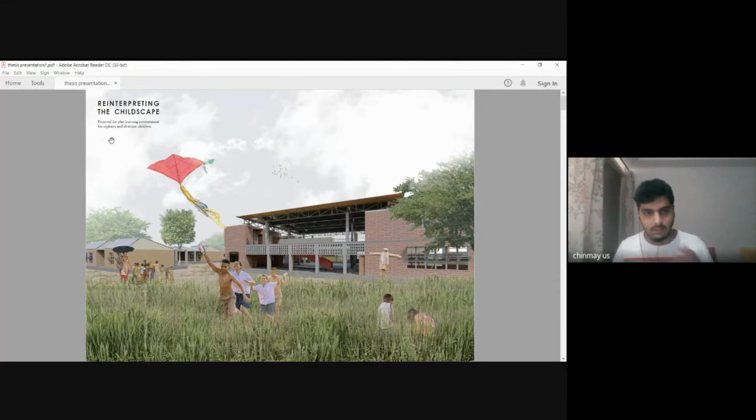So for my thesis, I did this called Reinterpreting the Childscape, which is a proposal for a play learning environment for orphans and destitute children. Before beginning the presentation, I would like to give a brief on what this project was about and what was the need for the project.

About the project, this thesis proposal tries to explore the role of physical environment in the design of a physical environment in the lives of children. For any thesis project, there are three components: observation, proposition, and anticipated investigation.

Coming to observation, what I observed was that schools which orphans and underprivileged children go to are very pragmatic, and they have very basic classrooms, toilets, etc.

So my proposition was that what is more important for schools is that they should be sensitive to children's needs and promote creative development. The investigation the thesis tries to explore is the role of architecture in a child's creative development through the design of learning spaces for them, learning spaces which can help them dream, aspire, and learn.

So we are in current times of 2021, and education has also sort of got reformed. There was this new National Education Policy that came in last year, which sort of reformed or is planning to reform the whole way education was being perceived in India.

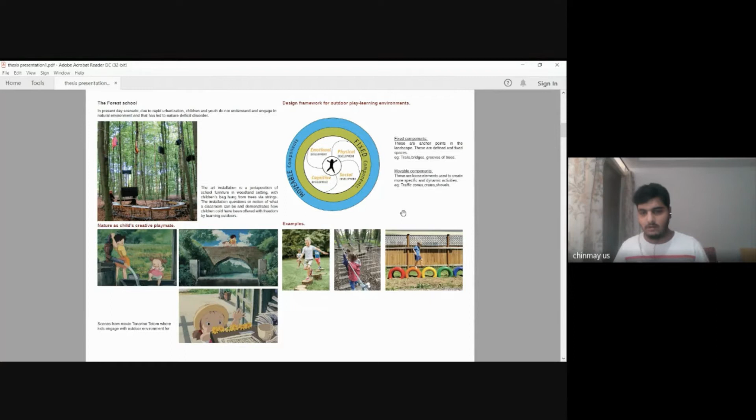So this is the case study which shows movable components and fixed components. If you can see, all these are textured pathways, and kids have these activity walls where they can write, draw, and all that. There are also some elements like seaters, where they can sit as a group or individually, and have storytelling sessions.

And coming to movable components, there are these very movable elements like tractor tires, or these slides, or these seaters.

Again, after going through a few articles, I realized we can't really design something and expect kids to use it that way. When it comes to kindergarten design, or designing for kids, more than designers, we are sort of translators. We design, and the outcome might be different. Kids might use things in a very different way. So we need to think of that notion of flexibility when we design any spaces for them.

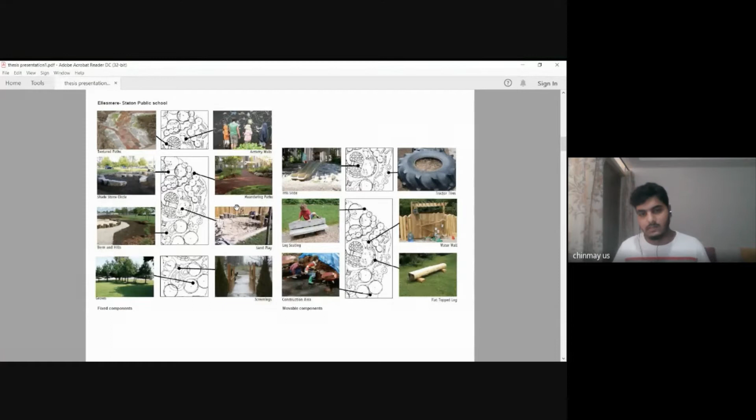So all this, why I'm trying to say is, I am not asking anyone to design these. All I'm asking is to think about these sorts of spaces, because outdoor spaces are just as important as indoor spaces.

So coming to the outdoor play areas, this circle now extended, and now we have certain different types of spaces for kids when it comes to outdoors. Those are gathering spaces, individual spaces, experimental spaces, ecological spaces, and active spaces.

So what are these active spaces? Active spaces promote fitness and health, which we usually see in a lot of our neighborhood parks. They have a lot of swings and acrobatic installations, which help them improve their gross motor skills. So those are the active spaces.

Gathering spaces are like congregational spaces where kids can come, have storytelling sessions, and share some of their stories, what happened in their homes, what happened in the class, etc.

And you also need individual spaces. Sometimes some kids might not go well with the community and want to spend some time alone. So as designers, we should also think of providing those spaces, a nook in the building design, a nook in the landscape.

Experimental spaces - if you see this particular image, in our childhood we used to do something very similar. We had some wreck of a boat, and made something out of it, and we needed some space for that activity. So these are like experimental spaces.

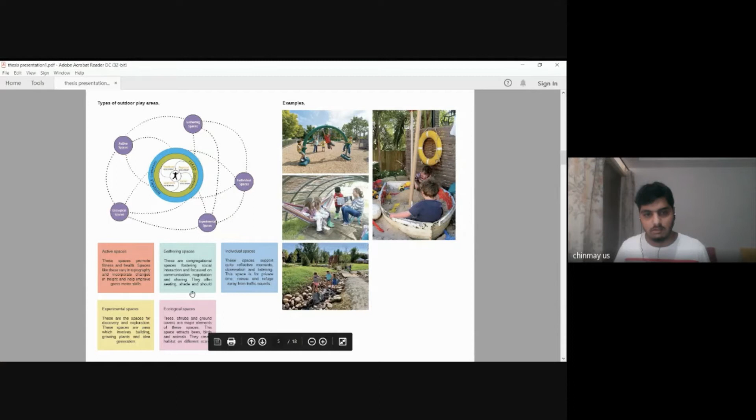So yes, this was the design proposal I made for my thesis. And the spaces which I discussed, I zoned them like this in my master plan. The site was north-south oriented, and in Mysore and Nanjangud, wind comes from southwest to northeast.

So in the south, I located this island. This island becomes the space for individuals. This is a water body, and you have the island, where kids can play. This kids' play area is an active place studded with play equipment, where they can have their physical development. And in the back, I have space for plantations.

I visualized my project to be more about spaces for rural kids, and the way rural kids see landscape is completely different from how kids in urban scenarios are brought up. I also have this very thick forest setup. When you have these ecological spaces, that also invites other biodiversity—it might invite bees and such—and that creates interest for kids to explore nature further.

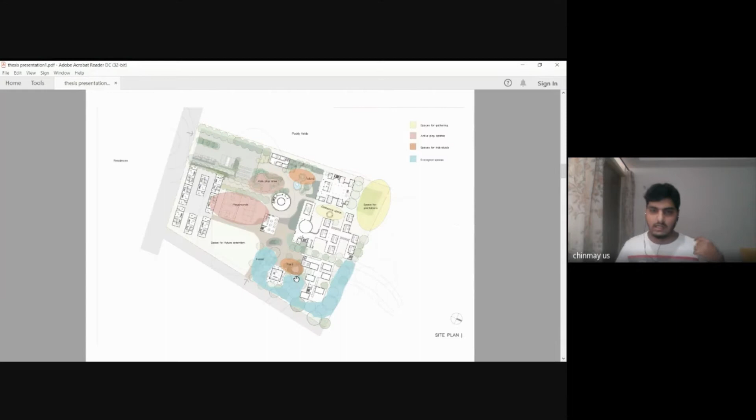So coming to the... until now we just spoke about outdoor spaces. So I will now speak about the indoor spaces as well. I call this 'unbox the box of learning.'

Unboxing the possibilities. In my childhood, if we recall, the only way we were taught was teacher-upfront instruction. The teacher was in one corner and we were all in the other corner, and they used to teach like that.

But nowadays, after that reform of education, something called active learning is happening. Active learning is basically children doing something and thinking about it. It also helps them think back on what they're doing. It's like a reverse process—you do something and then think about what you have done.

It also, more than instruction, goes into probing experience. It goes for group discussions, problem-based learning, cooperative learning—it's more like a design studio we used to have in college. So schools are becoming more like that.

So there are these possibilities: small groups, large groups, and individual support—two or three people coming together in a small group, and one faculty member who helps students achieve something together in the groups.

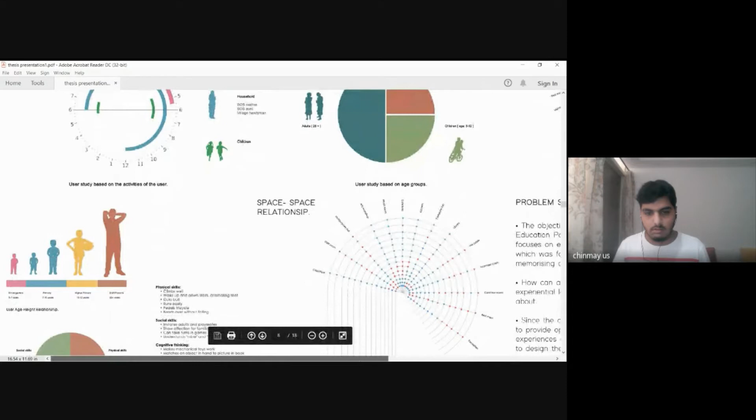One more interesting thing about this design is the age group. Why is it interesting? As we grow, our eye level also starts going up, and the way we perceive the space will be completely different. So the way a kindergarten child perceives space is entirely different from how an adult or support staff would perceive the space.

I'll make it more relatable. Like if you have visited your grandparents' place before - now it will look smaller, but it used to look bigger when you were a kid living in that space. That sort of might happen to most of us. So that is what I'm trying to establish here.

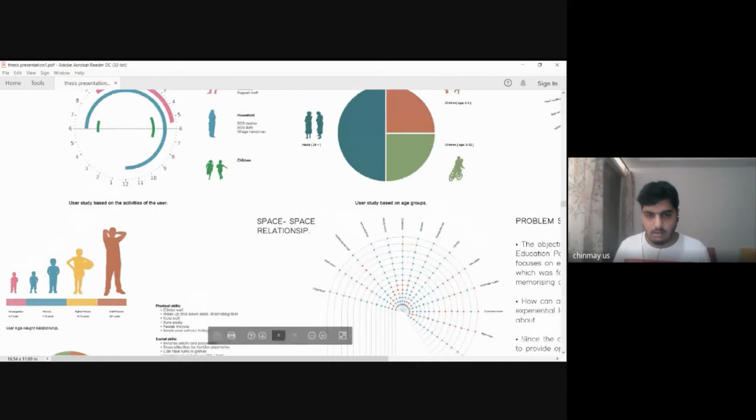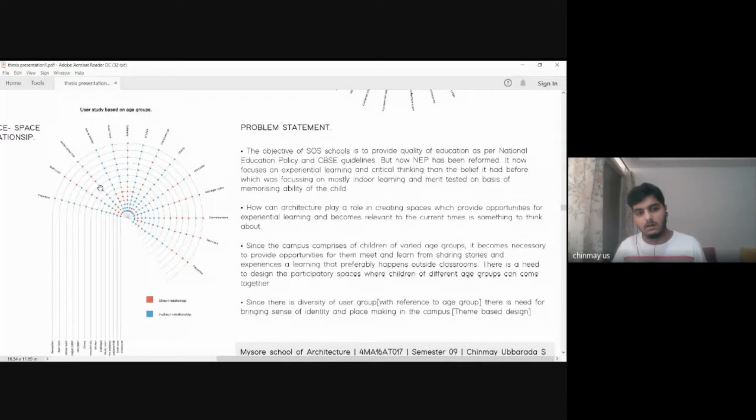I also did how user and space are related - which all users access what all spaces. So this was the mapping of that. And then I did space to space relationship - which spaces are together, which spaces can be far apart. This gives you the proximity factor of what all spaces can be grouped together, what all spaces can be grouped apart.

So finally, the outcome of all these studies is the problem statement from which we can take the design forward.

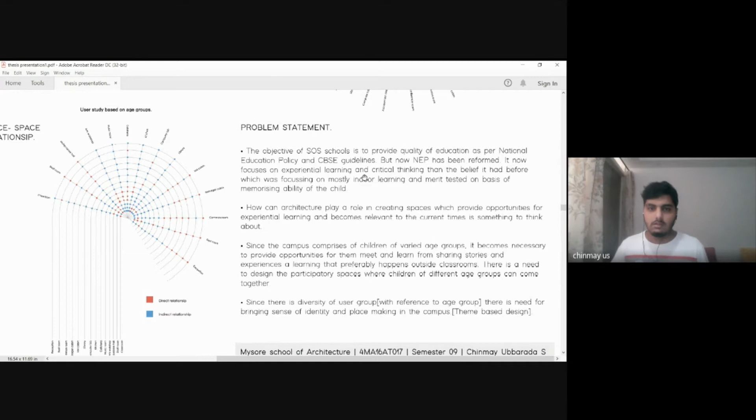So the design problem where SOS schools, which I was designing - when we are designing schools, the education institution becomes the mode of education, and the belief of education becomes very important. Is it a Waldorf system of education? Is it Montessori type of education?

Mine was a CBSE school. It was government-based education. Since the national education policy is reformed, how can I translate those into the current architecture is one of the problems. And how can architecture play a role in creating spaces and opportunities for experiential learning is the other one.

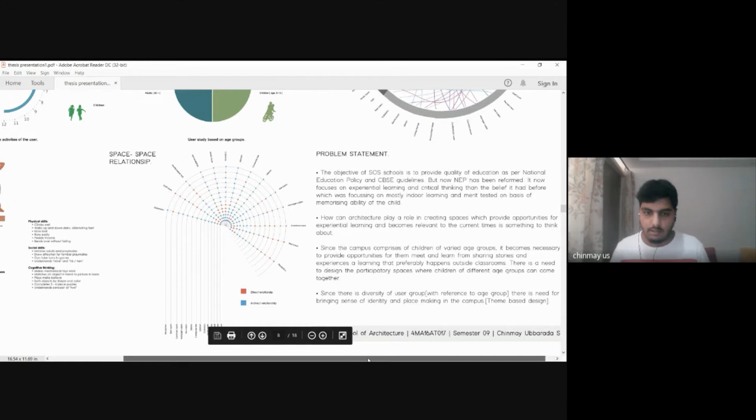Also in my campus, there were these different age group children coming together - all the ages from 3 to 12 age group were coming together. How can I cater to those different age groups was something I had to think about.

So coming to the site, I will briefly tell about what this site was about. My site was in Nanjangud. I had these few things in mind to select the site.

In thesis, we have this freedom to select our own site. So I had selected this site - a 7.5 acre site beside Kabini River.

One of the major decisions I took was there was this proposal of waterfront development happening here. So once I selected the site, this will act like a future possibility for kids to explore more about these surroundings, and also having a water body near the site is aesthetically pleasing in most situations.

Coming to the land use - government basically allots certain land for certain purposes. So I took this part of land which is government owned, and went ahead with the project.

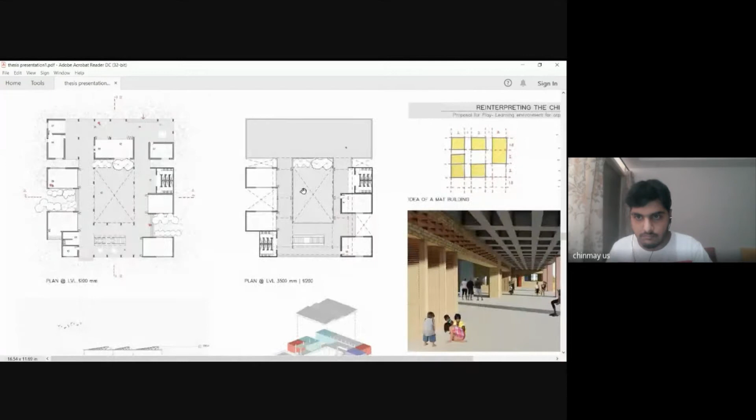So these are the bays. When you design any school building, we sort of design in bays. These numbers are units, like 2 1 2 1 2 - these are the bays, and in the y-axis we have 1.5 to 1.5. So 1 can be any number. If 1 is like 5 meters, 2 becomes 10 meters. That's the proportion of the space.

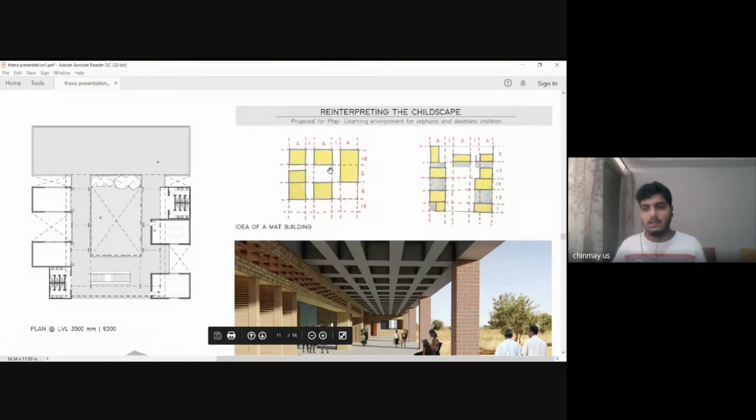In a centralized plan, you have this very little central space, and you don't have that sense of monumentality. What Corbusier did is, if you observe this bay and this one, instead of 2, he made one bay 1.5, and maintained that proportion. So you get this multiple courtyard sort of plan, which I did in mine, with a central huge space we call the participatory space.

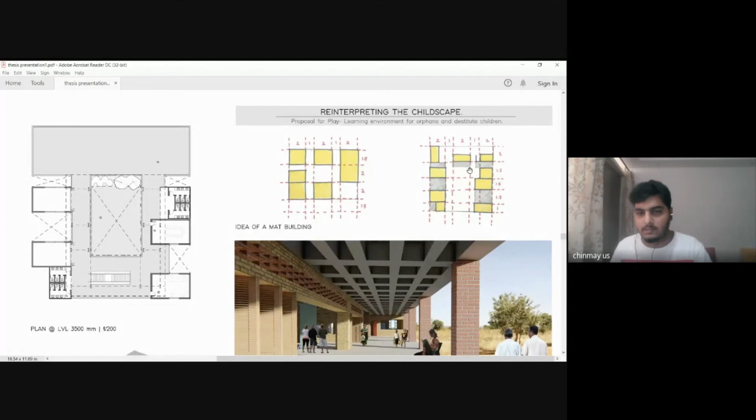There is a famous architect called Hermann Hertzberger. He speaks about participatory space. Participatory space is nothing but how involved you are, how much connectivity is there for you towards that space - physical, mental, as well as emotional connect to the space.

So yeah, this is how it was. If you see, you enter in this lobby, and you have this central staircase which sort of defines the symmetry of the design. You enter out, and there is also a possibility of getting out into the landscape from these courtyards. And this is the view.

Also, when you design, you need to have at least a vague idea of what that structure will be - will that be concrete, or will that be a steel structure? Because structure defines the nature of the building. Will the building mass be a heavy building imposing on the landscape, or is it going to be a light structure?

In this design, it was a mix of both. The structure looks heavy, but the roof was supposed to be light. So if you see, I have made these north light trusses. Inside, it was located towards the north-south axis, so I am trying to capture all this north light into my built space.

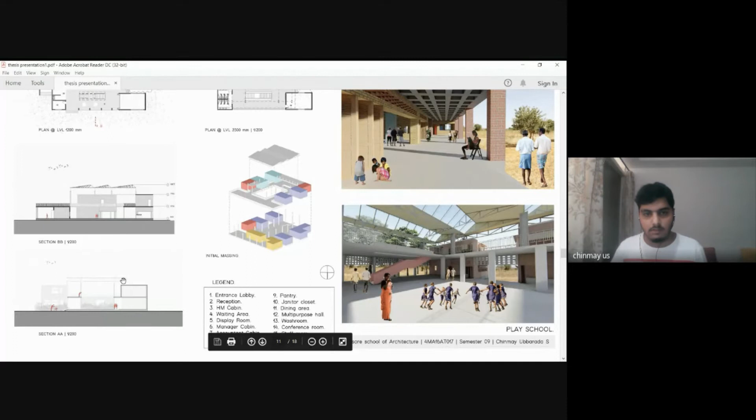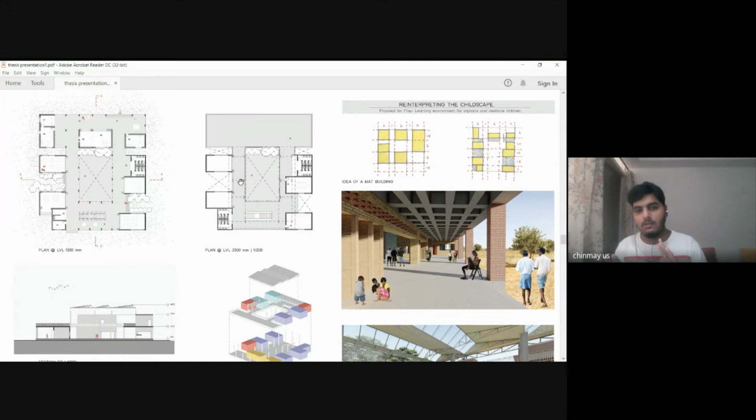In this section, you can see the different volumes - that central huge volume that kids get to play in. If you see the first floor plan, all this is built, then you have this huge terrace open to sky. So in this built form, you try and give diversified spaces - some enclosed, some semi-open, and some very open to the sky.

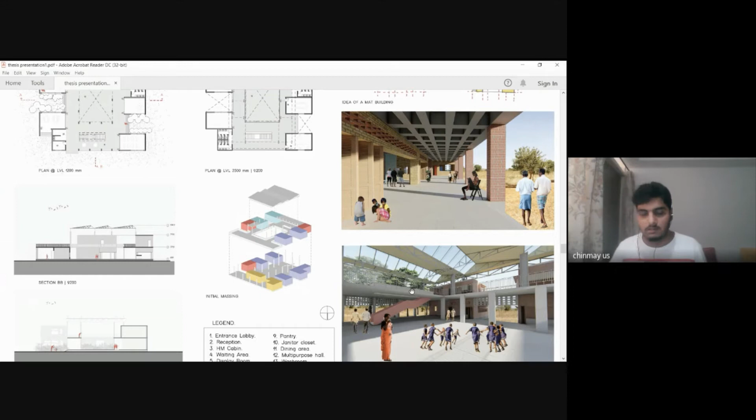How I made it visually connected—with these glasses you can still connect to the sky, to what's happening in the sky. You can literally see the birds moving through the glass. So glass is a transparent material. How you use it and where you use it is something we need to take the call on as designers.

This was the primary school block. The fun happens in the elevation and bit of section. So here you enter, and the whole idea was you shift the visual aspect, you shift the frames. You enter and you will not see the landscape—you will see the blank wall.

Then you enter, there is this curved wall. You will be moved into this sort of courtyard, and then you come into this big courtyard, and all these are the same modules of sloping roof. These are all the classrooms.

You have this space for gatherings where they can have prayer and other activities. That room becomes the emphasis for the structure. It will have the shell structure on top, and the rest will have sloping roofs. In elevation, it's also sort of like this.

You have this very long corridor in the front yard, and you have these pockets of built form, and the rest all opens up into the other frames which I was talking about. So it's like this, if you can see all this.

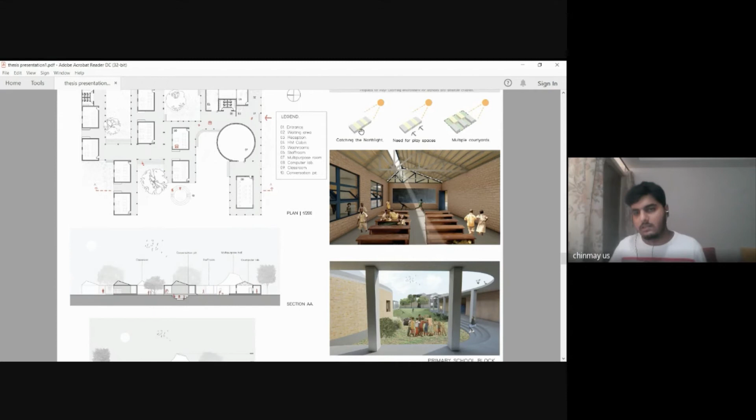So this is how it was planned. Catching the north light was the idea. You shift the blocks, create multiple courtyards—courtyards will help you ventilate the whole place and keep it cool. Also, you get this north light.

And this is the view from this part. I created these mounds where kids can play, and I gave them landscape, and it's up to kids how they use it. That freedom and flexibility is what counts in kindergarten design, I believe. From this view, you can also see the adjacent structure and all that.

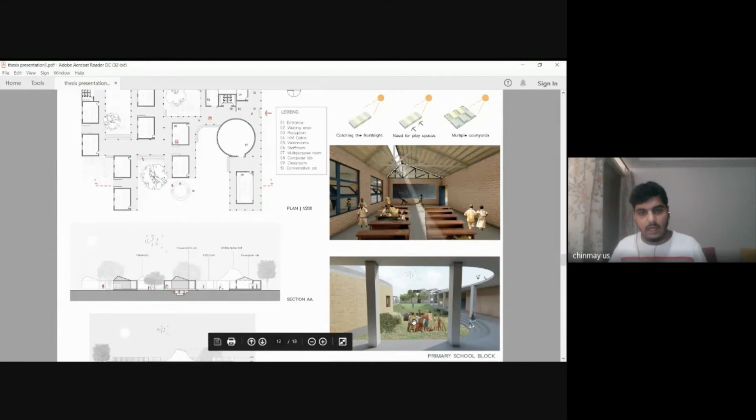Again, the building language is very sort of brutal—very exposed brick and all. But yeah, this is mine.

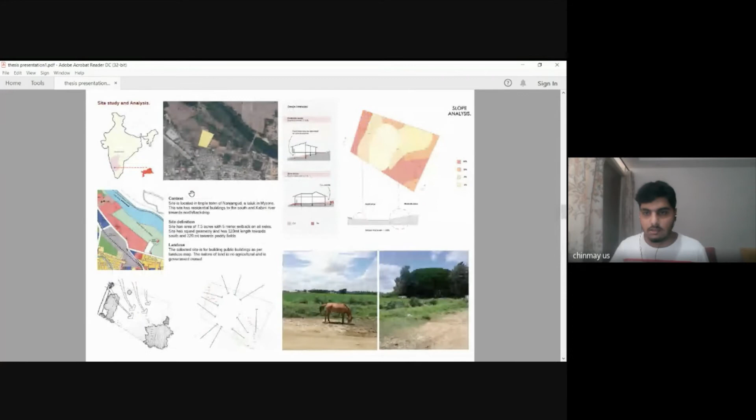This was that higher primary school which was on top of the cliff, on top of the site. It was located here—this is that block I'm talking about right now. It's surrounded with trees, and you had these dense contours.

So how I sort of solved it is to start playing with levels. For example, if you see Le Corbusier's Millowners' building, you have this promenade pathway—you ascend the ramp, and then you enter the entrance of the building.

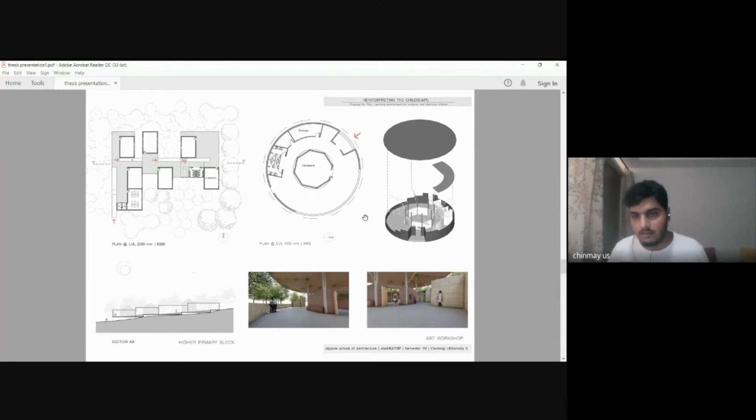Again, the structure is also sort of heavy, with an amalgamation of light structure. I have introduced bits of trusses to span that circular part.

And this was the library. So for the library design, I also envisioned it like a participatory space, where you have a central cutout so kids can peep into what's happening downstairs. This was inspired by the design of Villa Savoye, and all these—if you see, wait one sec.

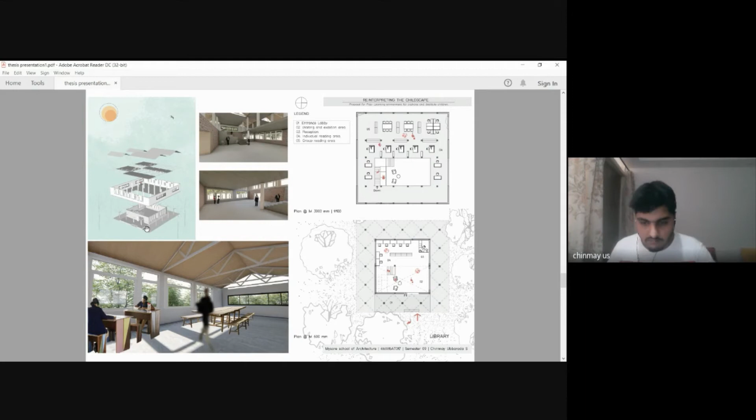All these columns are set in a forest setting. I have placed so much planting around, so I thought, what if the columns also sort of display the profile of a tree? So the columns were designed like that, to hold this jutting out plan on top.

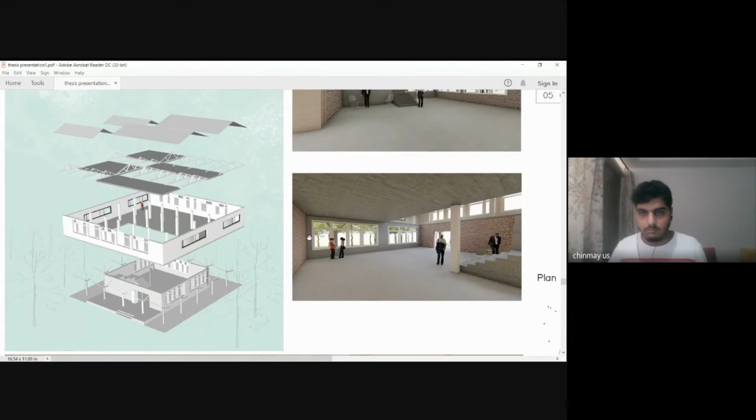Again, the nature of the spaces is about how you engage with the landscape at different levels. So you enter into this space, you have this lobby space, you have this reception, and you have this quiet reading space. You have these sort of ribbon windows on this part, which open up to the bark of the trees. I will show you this view.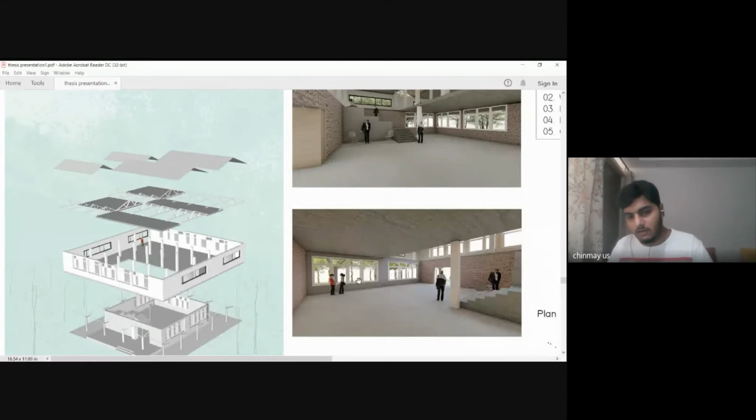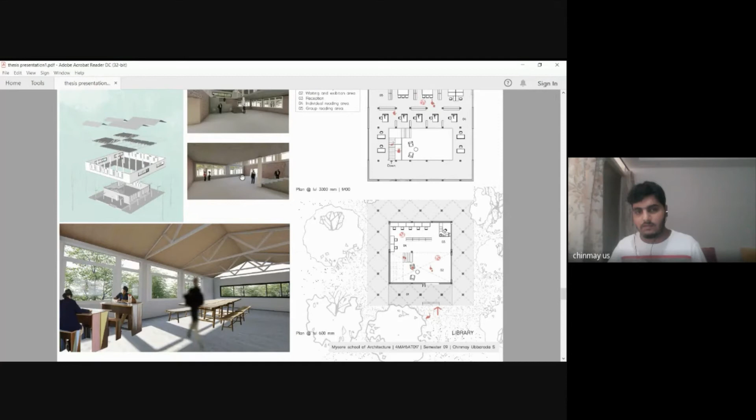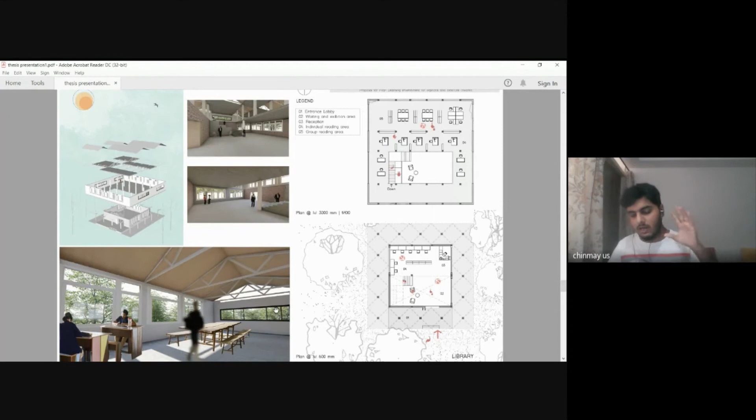So on the ground floor, you will see the bark of the trees. Imagine if you have those white bark trees densely packed, like the trees near Chamundi Hills, when you go near them. You'd have all those trees' bark that you're reading and seeing. Then you go on top to the first floor, where you have these ribbon windows which try to capture the foliage of trees. Everywhere there is greenery, and while you read, greenery is the best setting for proper peaceful reading. So I had done that.

Before concluding, I would like to talk about a few design parameters that I also considered while designing this thesis project.

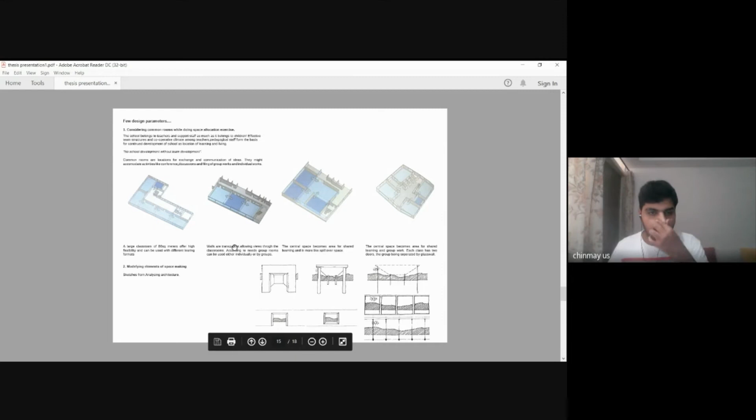There is a need for us to consider some common areas while doing the space allocation exercise, like having common rooms. It's time for us to think that school belongs to teachers as much as it belongs to children. So no school development without team development. You should also think about how schools are important for teachers to develop their teamwork.

So these are the spaces. In this plan, the classrooms are really huge and open up to one another, so you can have different furniture layouts when you have big classrooms. Or in another case, where you have area constraints and can't make a big room, you introduce one more central common room that opens up to both classrooms, creating activity space where you can bring people together.

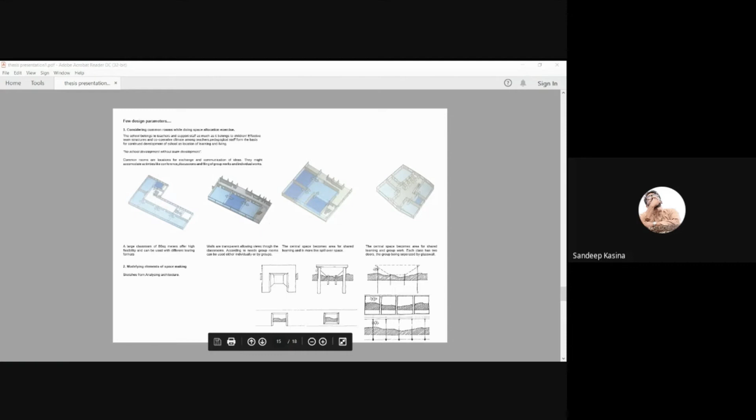I think, Chinmay, sorry, we're losing a little bit of clarity on the image. Can you zoom in closer when you're talking? Yeah, sure.

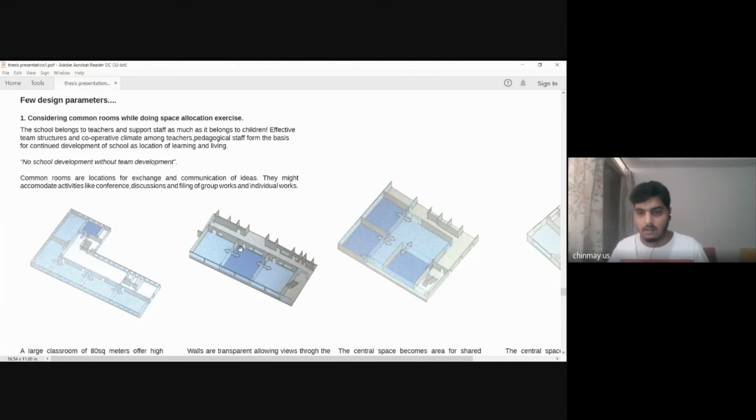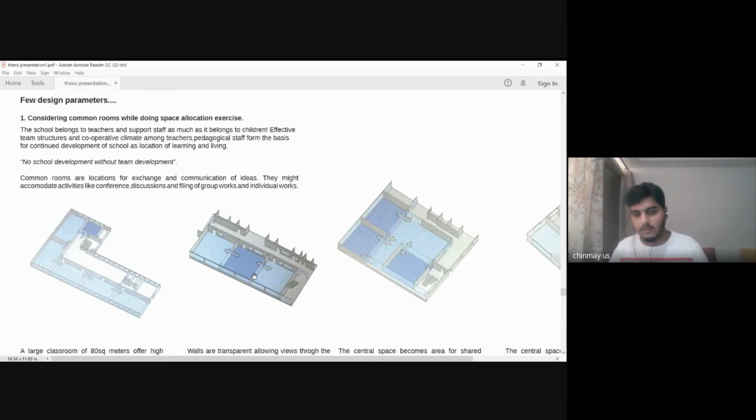So these are the small rooms, and you have common rooms in between for community gathering. A good example is if you've visited the CEPT campus—when you enter, you have that exhibition area and then the studio. They have a very similar setup where rooms open up, it becomes studio space, and then when a presenter comes it becomes a gathering space. You can also have this notion of spill-out spaces, where different rooms share one central spill-out space that can act as a place for sharing experiences.

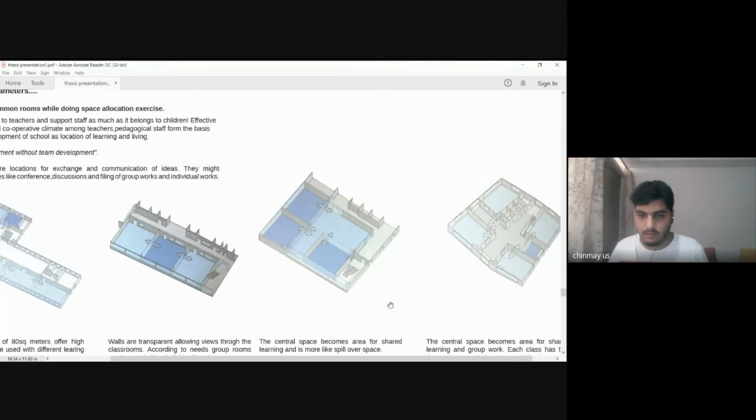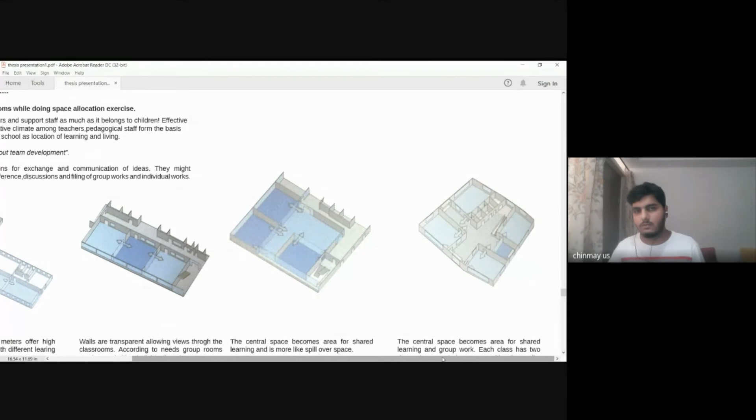The same happens in this fourth diagram. Spill-out spaces are nothing but extra spaces that can accommodate more people. Like at the MSA campus, the corridor width is quite more than it needed to be—almost 2.5 or 3 meters. Why that much? Because it acts as a spill-out space.

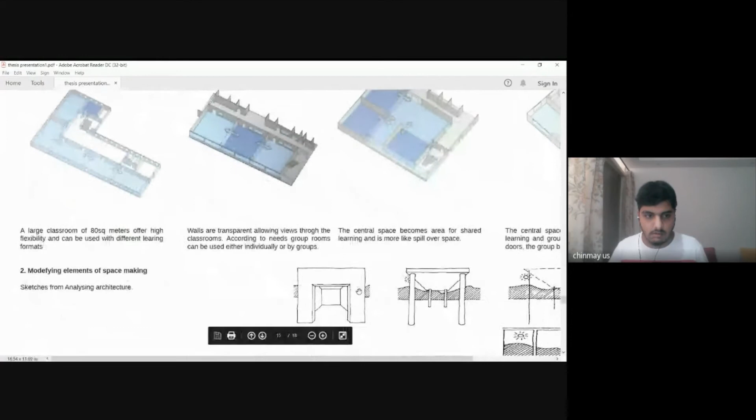Coming to design, this part I would really love to share. It's the basics we've all been doing since our first semester. There's this book called Analyzing Architecture, and in one chapter the author mentions modifying elements of space making. You have this concept in mind, and there's a structure and a concept—how do you translate that concept into structure? So these are the different ways of doing things.

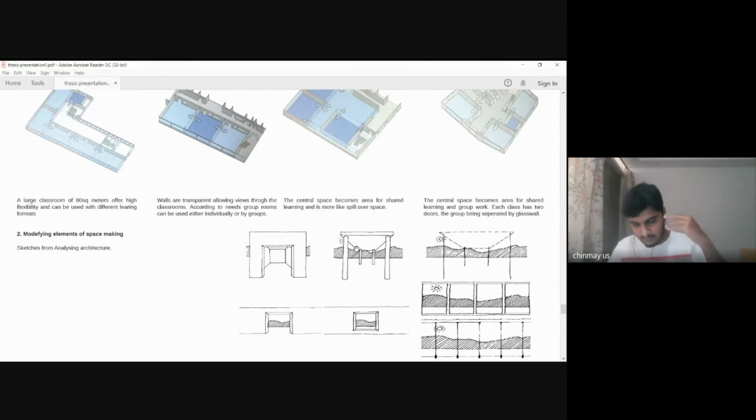In that book, I took these sketches. You can have your entrance like this, a very solid mass, very dense entrance, or you can change the nature of space—instead of making it enclosed, you can make it semi-enclosed with columns. The type of columns also matters; circular columns always put emphasis on space making. Or you can have very slender columns with no roof at all, creating a colonnaded pathway—you don't have the roof, but you still get that sense of roof because of the columns. So it's all about how you define the space and bring meaning to it.

One sec, sorry. Also, one of the vital things for any building design, especially for schools, is the fenestrations or openings. How much opening and where the openings are placed is very important.

In that design, the kindergarten design, I had opened up the roof also because I wanted the kids to see the sky and the foliage of the trees on top.

And windows also play a very vital role. You can have a dark wall with darkness, and you can have one circular window. Through that light enters. That creates certain emphasis.

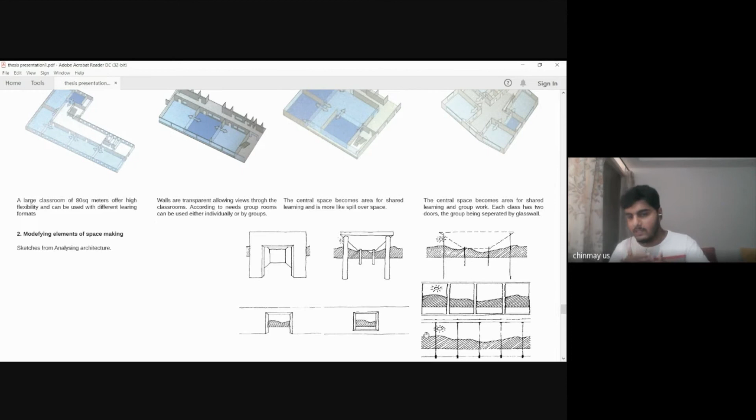Or if you want to connect the building to the landscape, you do these types of windows. If you want to expose the structure, you can have these frames interfering, which act like multiple paintings or multiple frames framing the landscape. Or you can have a glazed facade, with just seamless glass which opens up to the landscape, where there is not much difference between your built space and the landscape. So that is also there.

And coming to program and structure. So one challenge I face every time is I have a lot of spaces and I have to organize them in such a way to come up with some notion of how the structure will be. Will it be G+1? Will it be a ground floor structure? What will be the shape of this thing?

So these are all the possible ways you can achieve it. You can have a linear structure with a linear entrance. You can have this angular structure. You can have this H shape. You can have all this. You can in fact defragment the whole program and arrange it like that. So all these are ways to organize the spaces.

And how do you organize the spaces? You can organize it in many ways. Areas with similar sizes, like big areas can be moved to one bay and small areas moved to another bay, or bigger areas can be grouped together, with smaller areas mixed with one bigger area. Also you need to think about what spaces go towards one another, how will they connect, all that. So that was about program and structure.

And this was a movie I recently watched. I've been watching Miyazaki's movies. So this is about the scale and perception of space.

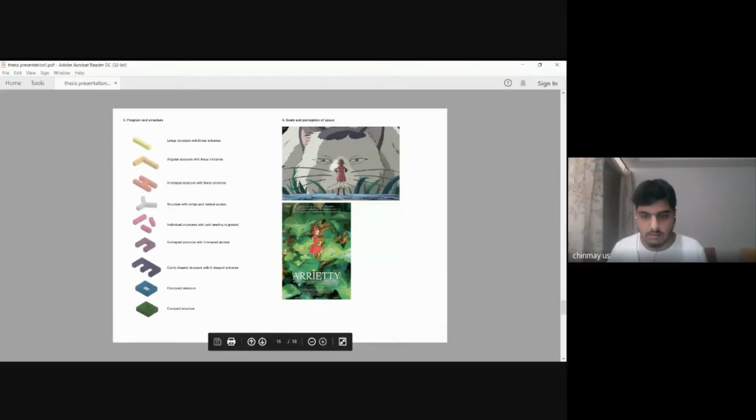So yes, that was all my presentation about. Thank you for this. If you guys have anything to add, you guys can tell.

I took long, is it? 24 minutes. Yeah. Yes sir, I'm sort of done with the presentation.

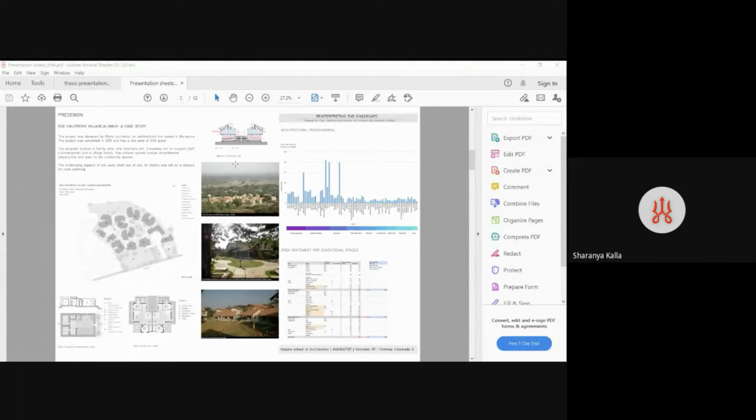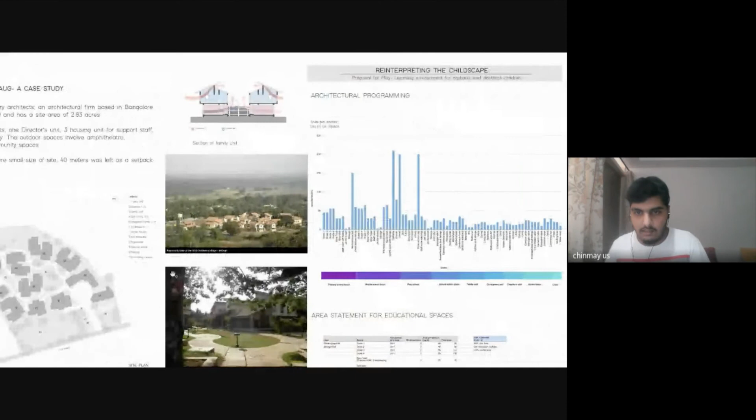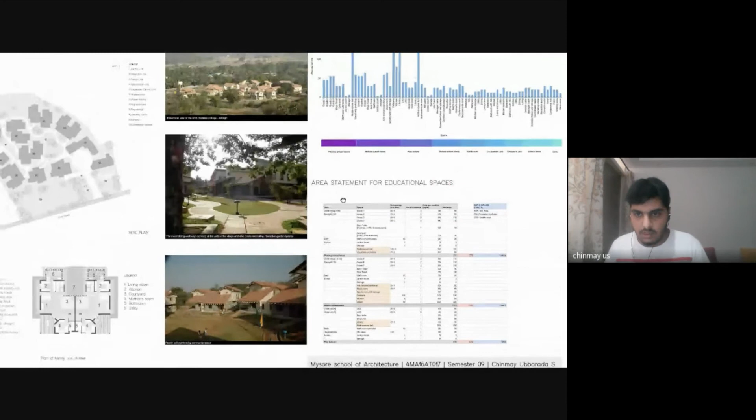Are you guys able to see the screen? Yes. So after the study, I have this long list of areas, for this classroom. We start with a basic Excel sheet - you have this space which is like the classroom.

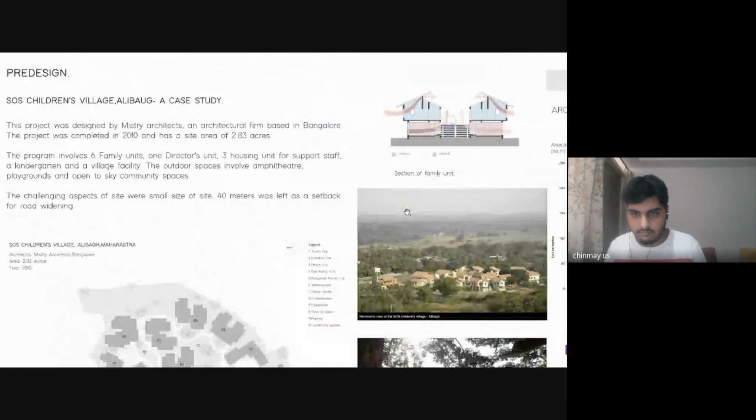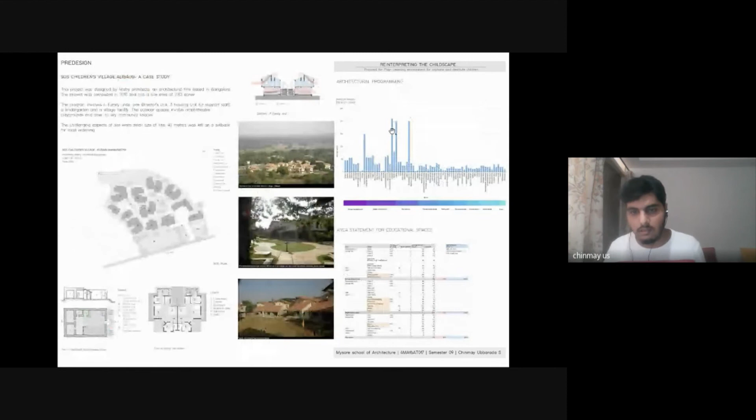So you have this huge Excel sheet where you have this list of classrooms and then you have these areas on the side. You make a list of all these huge areas and spaces on one side, it's like a graph and you make all the decisions together. The bigger spaces, you have this huge list of spaces with varied areas.

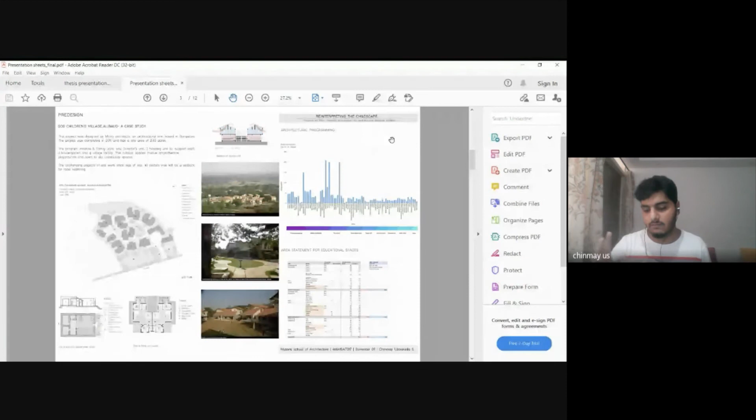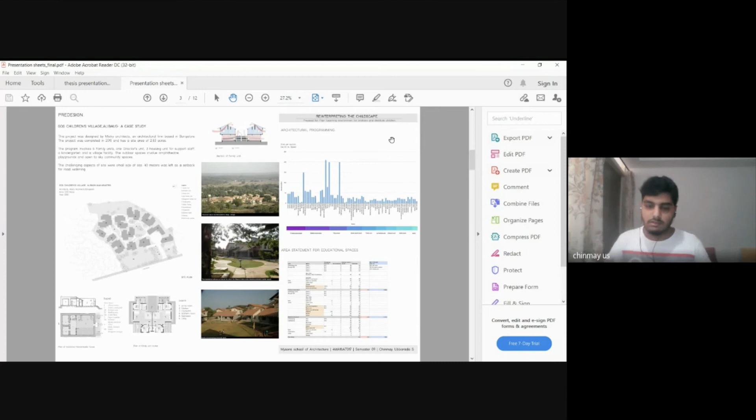But before that, you need to have something called bubble diagrams. Bubble diagrams can be done in two different ways: without considering site conditions, or by considering site conditions in a later stage. Bubble diagrams are basically to figure out what areas come together. Probably the entrance, foyer and administration blocks can come together, and the classrooms and cafeteria can come together. So you put those together, and that is the purpose of bubble diagrams.

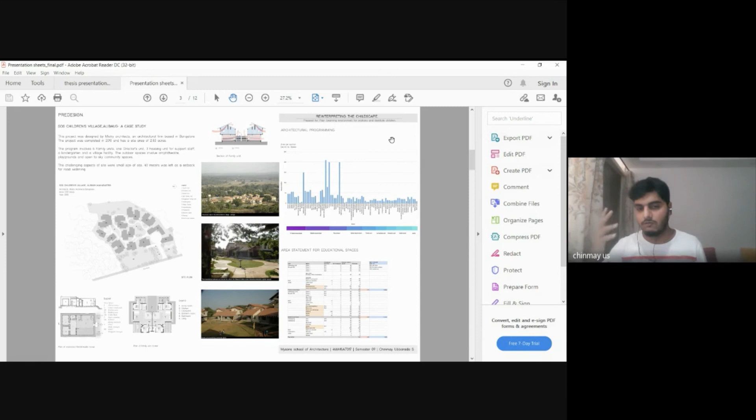Will it be square? Will it be rectangle? 50 meters square is L into B, right? So you figure out some dimension - will it be a squarish dimension or a rectangle? Then you mass them together - which areas can be grouped together according to geometry. And then there might be some situation where you need very skewed geometry also, which is fine. You might end up having certain areas which are semicircular or triangular. That is also fine as long as they go well with the structure and the geometry.

And this is how you zone, you group the areas together. Once you have all the areas together with proper guiding principles, then you go ahead with the massing. Which areas, on top of what block will other blocks come? Is it feasible to put a multi-purpose area on the ground floor, or should it go to the first floor? All that, and where the staircase is coming.

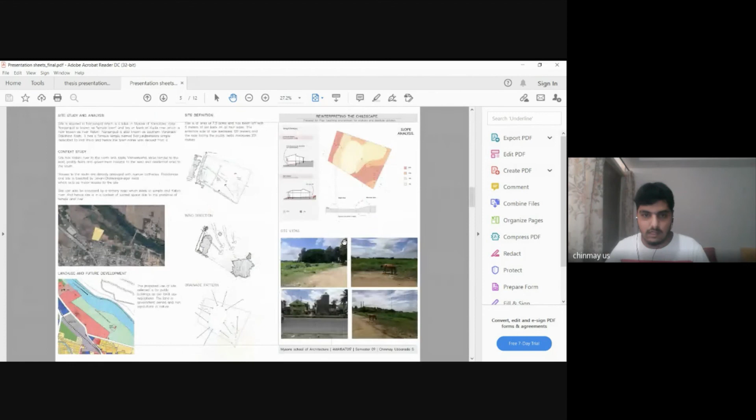In my scenario, I had a grid that is very similar - you have like 3 rows of buildings. One row of institution building, then in the middle you have playgrounds, and in the last you have housing. It's a very clear distinction of axis, 3 different lines of 3 different building typologies. And when I zoned them on site, on the basis of the bubble diagram, I made this decision: okay, you have this wind direction coming this way, so let's zone our water bodies and other water features towards the south, so that you get the cold breeze inside.

And then how do you orient the building? While zoning, while putting that bubble diagram, I also partially made the decision - let's orient the building north-south, to capture the north light and get the south breeze. Also, when you zone the building, you take into consideration site factors like views - from where it opens up to views. Here I had paddy fields. Opening up to views doesn't make much sense here, because there's already a dense forest at the back.

And here there is no point in opening up views towards the landscape, because it's a barren land. You figure out where the potential viewpoints are, and while doing that bubble diagram, you partially decide, though it's not the concrete idea yet, that's the decision you're making at the bubble diagram stage. You figure out vaguely where you'll be zoning your structures.

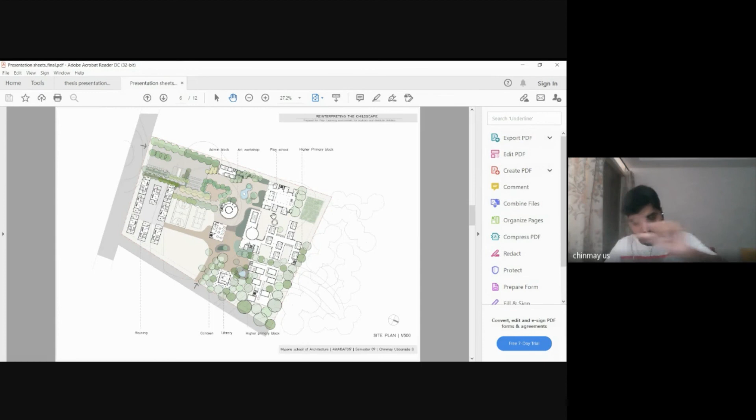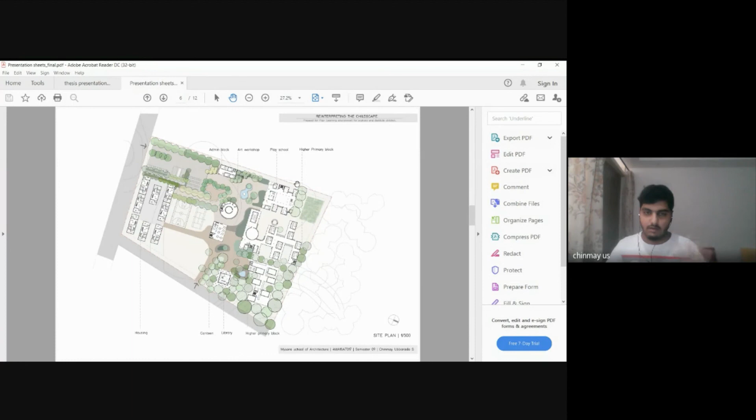In this case, this is on the highest point, because I intended it to be a temple for learning sort of metaphor, so it comes on top of the site. So all those decisions partially happen at the bubble diagram stage, and once you figure out all the areas together, you will have your structure ready.